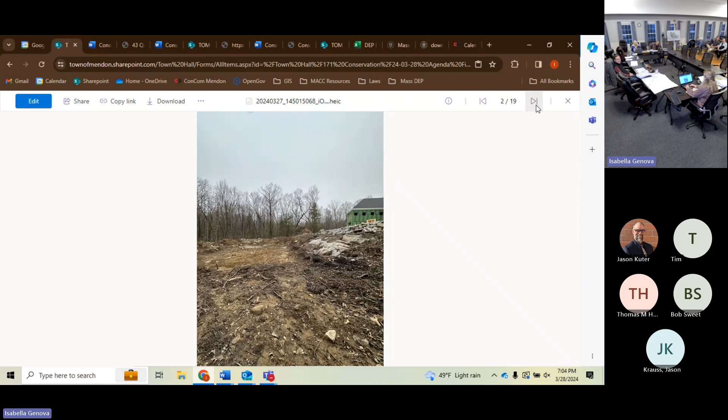Or down the hill. Yeah, and then 101. They've cleared the majority of the lot and started building. Everything upland is fine. And then at the stream crossing, they added sediment, not at the stream crossing but down along the driveway. They've had quite a bit of washout with the rain. So they also will have to be doing cleanup for these. Expect to be going out again in a week, two weeks.

And I don't think for 101 Blackstone Street it's going to be this week or next week because it's all contained in the wattles. They'll just have to do it. Did they send you new plans or anything yet? They haven't sent new plans. No, they're going to update. There's additional flagging that's been hung up that we don't have. So there's more to come for Blackstone Street.

Sylvan Springs, there's a new report, and that was an old report. It's an old, okay.

Agenda item 7, CR conservation restriction updates. Any progress on the Maple Farm CR and are providing feedback? I haven't submitted the feedback to them yet. I didn't know if other commissioners had more on top of yours. Okay. Other than what we were talking about in our last meeting, looking at the CR, additional feedback?

Okay, Peter, have you taken a look at it? I'm sorry, not Peter, Tim. Bob's there as well. No, I have not. Bob, do you have any additional feedback? Are you comfortable with Isabella sending it along? I'm comfortable with that, yes. Okay. If you're having time issues getting that back to them, let me know and I'll work with you on that. But that's not held up.

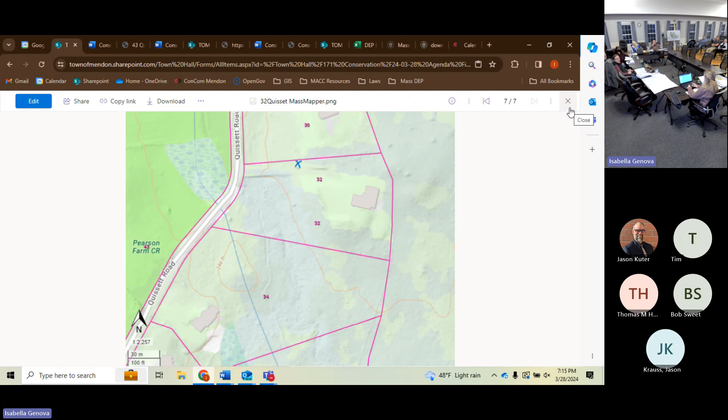Anything? Rub out that stump.

Okay, the clocks in town hall look to be a couple minutes fast, but our internet clock says 7:15. So we will be able to open the public hearing for a notice of intent for 3537 Hastings Street, 1820 Washington Street, the DEP number to be determined.

You are in a buffer for this? I am, so I will. To the audience, okay, come on up and introduce yourselves. I'm not talking tonight.

To set expectations, my understanding from talking with John Nenard is you're going to be making your initial presentation tonight. You have received Isabella's feedback but will not be addressing it. The commissioners and concerned members of the public will have an opportunity to raise additional issues, and then you'd be back in 4 weeks, since that's how fast you're working with the planning board as well.

Okay, so we'll sit back and enjoy your documentation. Presentation - you want to do it over there or over here? Can the camera see us over there? If you stand kind of where I'm sitting, they'll see you. It sort of does - I stood over here for the planning board presentation. Pretty cool, nice and big for everyone to see.

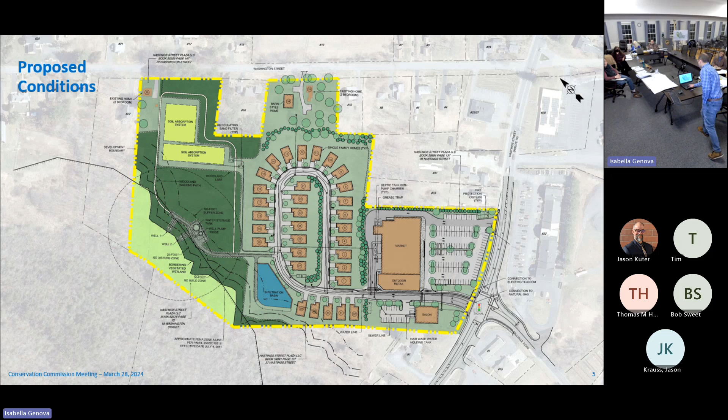So if you don't mind, I can jump to a slide, take it back to Tom, just to talk a little bit about the specifics of our request under this notice of intent, both under the Wetlands Protection Act and the local bylaw. Matt kind of described everything at a high level of detail.

The most impacts we're going to have is in this area where our wells get close to the wetlands. Most of our impacts are going to be pervious, that being the access drive to the well and pump house, our infiltration basin, and then our only area that's actually going to be impervious is these two houses.

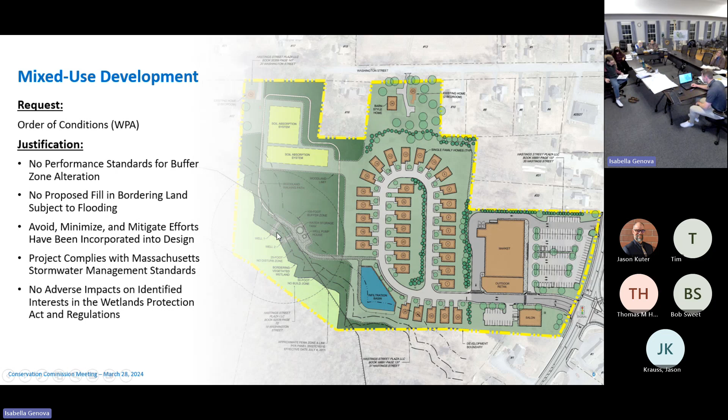Going back to it, the closest area we're actually coming to the wetlands themselves, there are two wells, which Matt described in great detail. The rest of it is going to be mostly pervious impacts, that being the access drive, which is located right here. We also have the woodland walking trail, which is this line right here. And then parts of our soil absorption system is also going to be pervious impacts, and additionally our infiltration basin. The only impacts that are actually going to be impervious are going to be the two single family houses, which are located here and right here.

We're also going to be building within bordering land subject to flooding. However, we're not going to be changing any of the grades to put in this gravel path, so we don't need to provide any additional or compensatory storage because we're not going to be impacting that. We're going to be keeping the existing grade out there. At this point, if you have any questions about the wetlands impacts, I'd be happy to answer them.

I guess the grade for the gravel road isn't on the plans. As you're saying, you don't need to provide the compensatory storage because it's going to stay the same - will you be leveling it out? The gravel's going to have to be level if it's slanted or the elevation goes down. The gravel drive will follow the existing grades, so there's no proposed grades shown because we're going to install it at existing grades. So those grades are representative of the final condition.

If the two wells need any machinery maintenance, how are they going to be going on an uneven gravel path? No, this area is very flat towards the rear of the site in the woods. I don't want to just guess at the slope, but it's around 5% or less coming down through here, and then it really flattens out as you get down towards the 50-foot buffer line. Really, it's a drill rig that comes in to drill the wells.

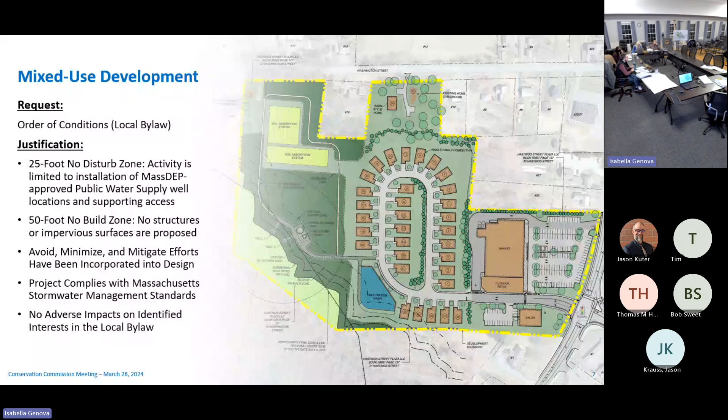All right, if there's no other questions from people online or in the commission. What's the date of the meeting four weeks from now? I think it's maybe the 26th. So John would have to request the continuation. Can you give us a date for that? The 25th, I will bet it. Good guess. Okay, I will wait for someone to make a motion that we continue the public hearing for the notice of intent until April 25th.

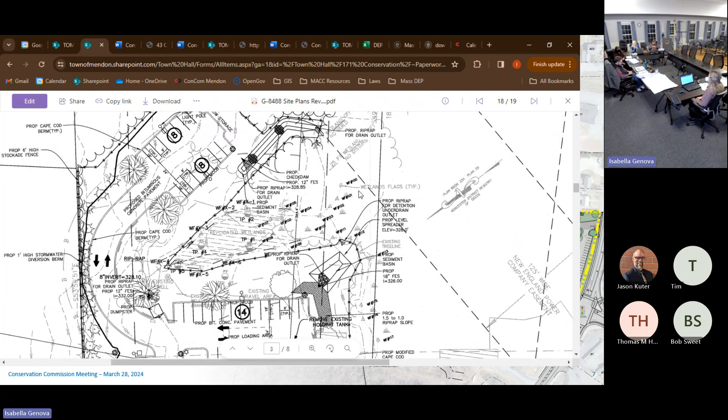They doing that for the state? No, this is who's probably Tighe & Bond doing it for? Probably, Tighe & Bond is doing it for the highway department under stormwater. Yeah, our highway department. Oh, your taxpayer dollars at work. No, it's mostly funded by grants, actually, so far, their work.

So I'm assuming that's the one near that crosses the street. Where are you? Hopedale Street. Okay, 58 Milford Street, that was drainage. If you drive there where they cut down a big 30-inch diameter tree, you'll see the stump, and right in front of it, you'll see a catch basin that has no reason to be there. So I'm assuming that's the one that must cross the street.

Well, we'll be getting a copy of the report, I presume. I don't know when that's coming, if it'll be in this timeline, but eventually they'll have an inventory of all the pipes. Maybe we could reach out to the highway department and ask, you know, say we're concerned and would like to be kept abreast of this particular project.

Also, it might be the state issue, right? So if it's Route 16's catch basin, is it... well, that's why I asked. Basically, who's paying for it? It's a state mandate, state control, ordered, maintained. Who's paying the engineering outfit, Tighe & Bond? For the whole town-wide assessment, it's the town, but my sense is they might not have Route 16 as part of their scope of work, because it's not a town-owned crossing.

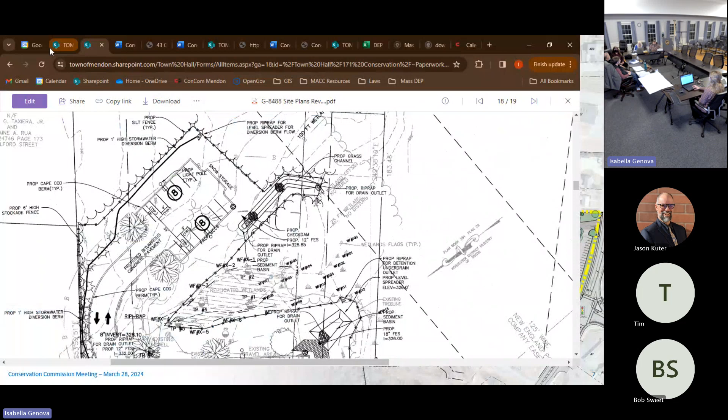Sure. I know you were nice enough to supply me with the information that you guys had already gone through this once with this particular thing, but they are clearing more there and back on the left-hand side. Is this parking for the winery? Yeah, exactly, we talked about this last summer, 5 minutes before we interviewed her.

And now we're talking about it again, they are clearing more land on that left-hand side if you're looking at the property. Is it his land? It is, isn't it. But it's also where the wetlands are. How do you know it's the wetlands? Has it been flagged? It hasn't been flagged, which would be my question.

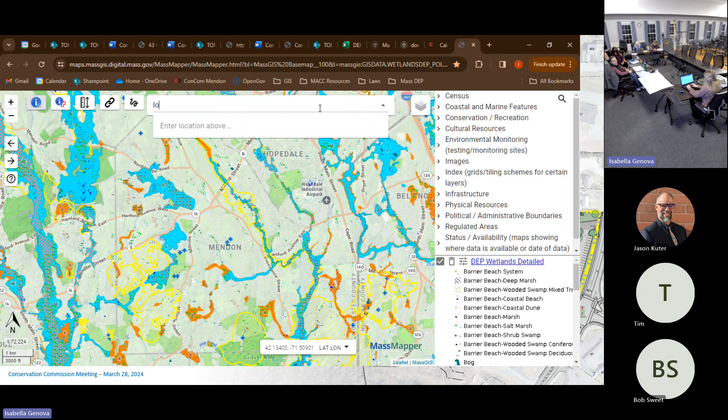The GIS locus - when I went out last summer, by eyeballing the end of his drive, at the end of the parking lot and the buildings, I could look at the Mass GIS locus and say okay, let's measure down 200 feet. Nope, he's got clearance. If he's continuing to work northwards, he's getting close to that 200-foot buffer, and we may want to ask him to check in with us on this.

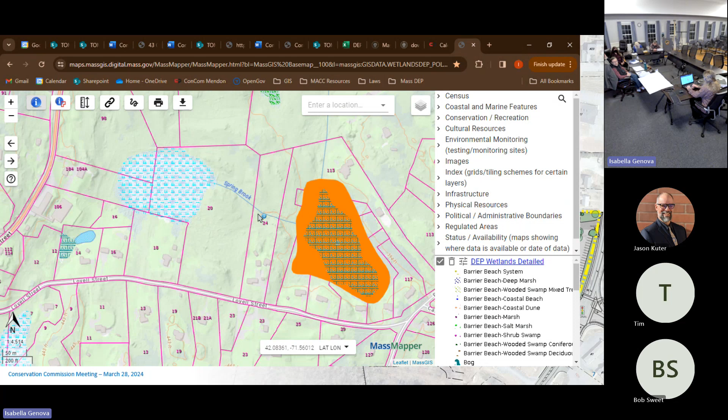I think it's this lot. Yep, that's it. And where he's working is that left-hand side, backwards. The parking lot is now right here. Can I point to where he's clearing? Yeah, come up over there. And again, I can only see what I can see from the road.

It's private property. But if you're saying the parking lot ends here, approximately - yeah, this is the building that I took the picture of last summer. So can you move the mouse here so Bob can see where my hand is? So this house down here. Okay, so where he's clearing is here.

It's still on hold by ZBA about the parking lot, but the lot there is cleared. There's huge piles of trees - there's one you can see from the road, and I think I saw another one probably 50-75 feet behind there.

That's the tree farm, right? This is the Vandervalk Winery. Yes, that is also a Christmas tree farm. Oh, the Christmas tree farm, yeah, but it's on the other side - across the street, south.

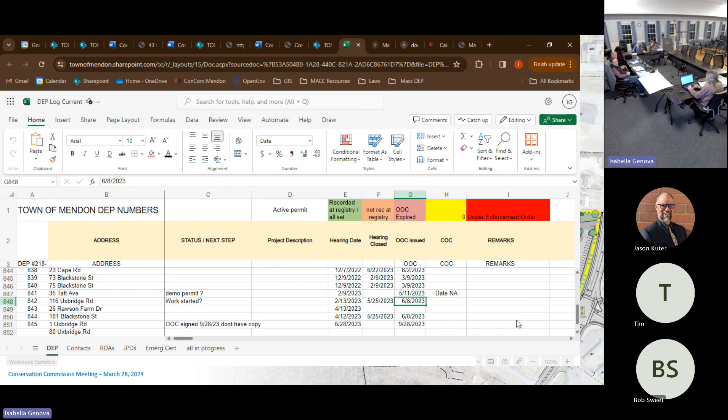Does that do it for us, Mr. Chair? Or did you just want an address for this, on Uxbridge? Well, if we're gonna ask Isabella to go look at something, I want to have an address. It's either - I don't know, I just stopped sharing it. Across the street from the Hideaway Pizza. Yeah, I know where it is. If we put that in the minutes, it'll give her time to get an address. Okay, well, it has two different addresses.

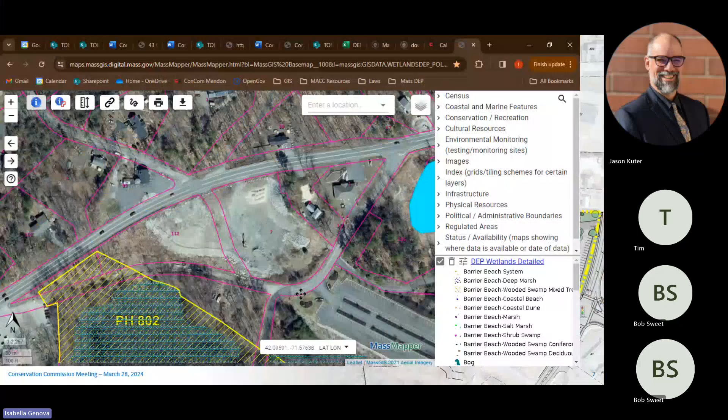It's 116 and 7, so I'm gonna have to look at it more. There's no mailbox out, but the access might be off of Nipmuc, so it might be 7, around the back. Yeah, it looks like it's 7 off of Nipmuc Drive. There's some sort of road in the middle - is that the road you're talking about?

So is this something Isabella should go talk to them about in the next 2 weeks, or will it wait? It'll wait - I just wanted to put it on the radar. Again, these are things she's got to try to fit in, since she's being loaded up with work from other places.

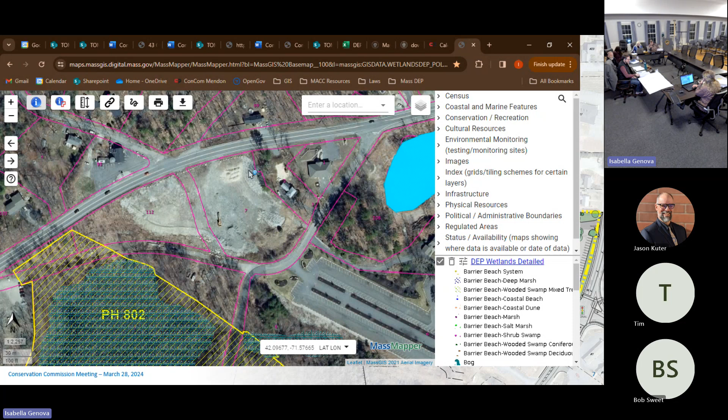I think it's maybe helpful now that I've gone through some of the older permits and started going through open permits, seeing the activity around town - are there higher priority open permits I should schedule walks for, now that we're getting back into construction season? She's getting acclimated to the job, to our records, to the town.

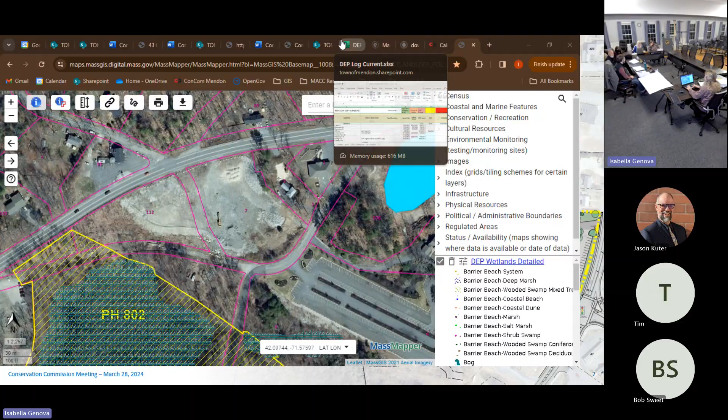Yep, cleaning up our act. Sorry state of our records. All right, any other items?